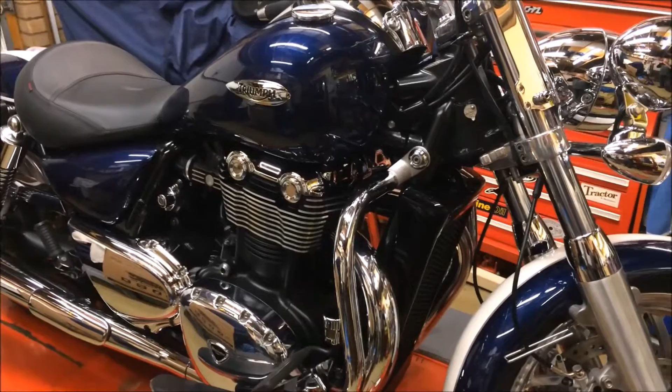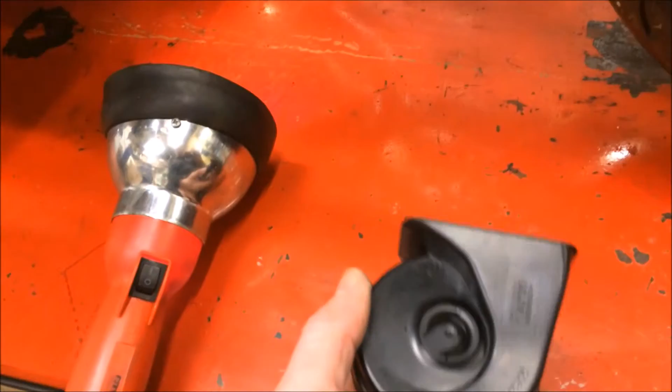Hello, it's me again. I'm just going to start another new project, and one of the things I wanted to do through the winter was I wanted to fit a new hooter on the Thunderbird. The original fitment's a bit weak and feeble, and so I purchased one of these, which I've already fitted one of these to the BM, and it's a good throaty sound.

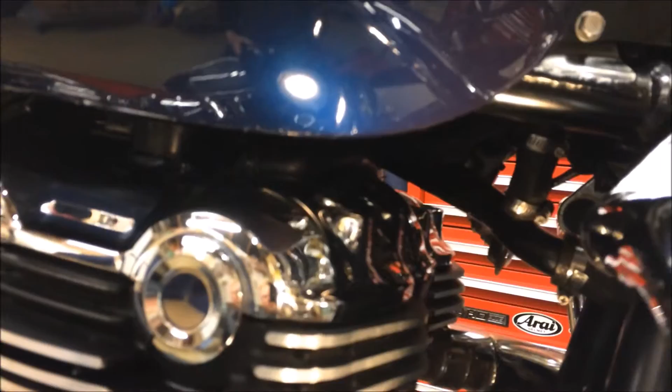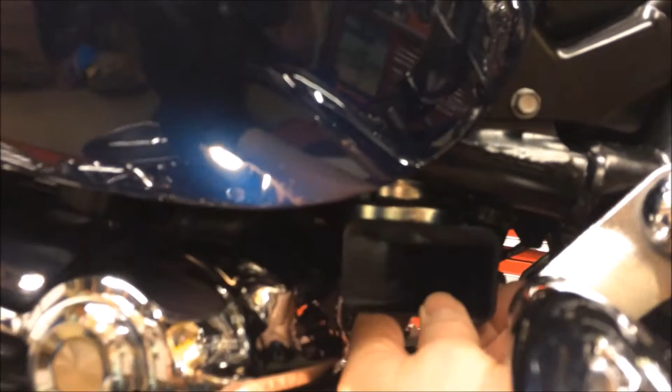And initially I really wanted to tuck it out of the way, and I initially thought it would probably actually go underneath the fuel tank, but it doesn't. There's a lot of space underneath there, but not enough to get this in. And I did originally manage to get it mounted off a bracket just in there, and I thought that would have been

okay. The reality is that it wasn't, because every time you try to get your hand in to clean, you were skinning your knuckles on the horn itself. And the second thing is, it's actually quite exposed there, and I could see it all filling up with water.

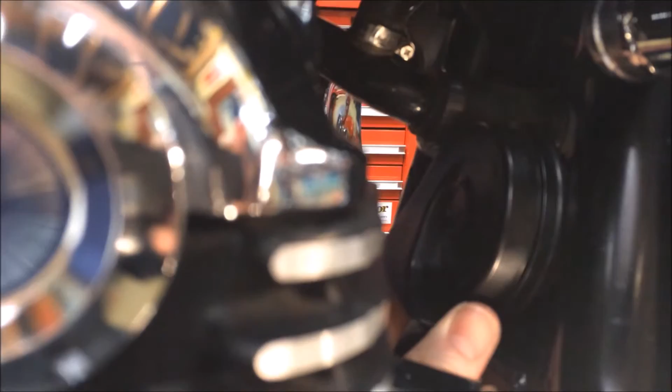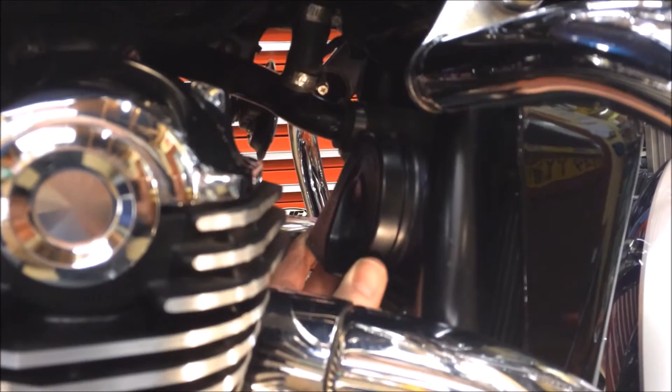So what I'm thinking now is I'm going to try and make a bracket to clamp around this frame cross member here, and I'm going to try and make it so that I can get the horn tucked up in here, so that it's as far out of the way as possible, and it doesn't stick out too much. So that's what I'm going to try and do, and I've had a bit of a think about it. I've done a drawing, so I'll take you into the next room and show you where I've got to so far.

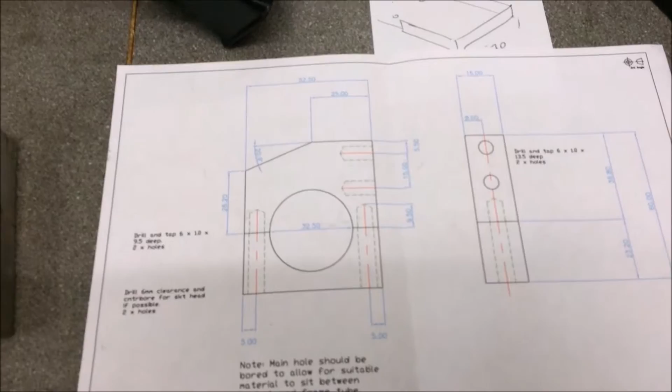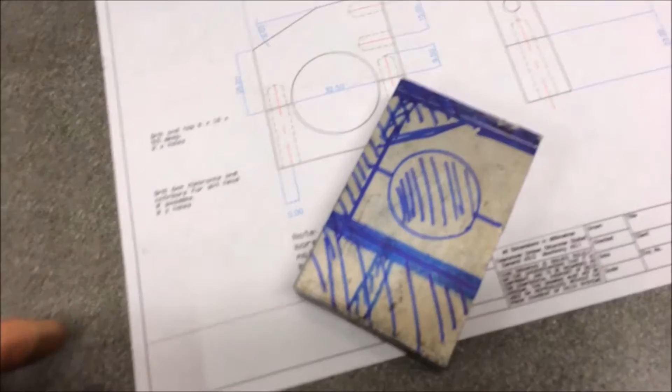Okay, so I've done a drawing, because if you do a drawing it just helps you see lots of things that you are likely to miss if you just try and machine without considering it. So what I've got here is a block of aluminium, a bit of a beat up block of aluminium, but I think there's enough meat in there to actually get this bracket out of.

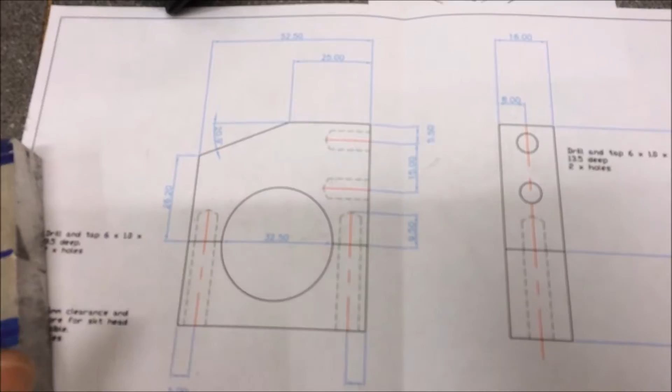And so I've got a block that is 60mm high by 52.5 wide, for want of a better word. Thickness is irrelevant, if I'm honest with you, but this is about, what is this? It's about 19mm. And it's just a piece I had kicking about in the workshop, and I thought that would come in quite useful.

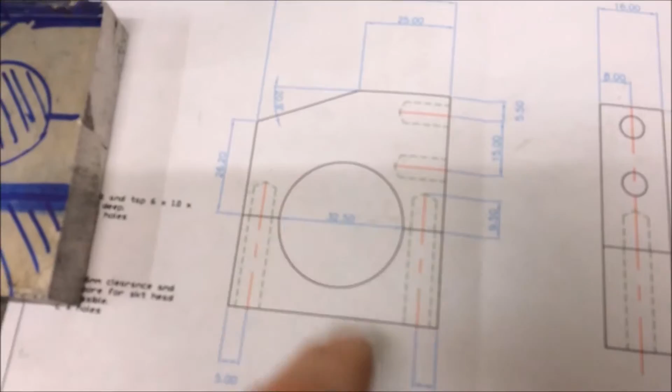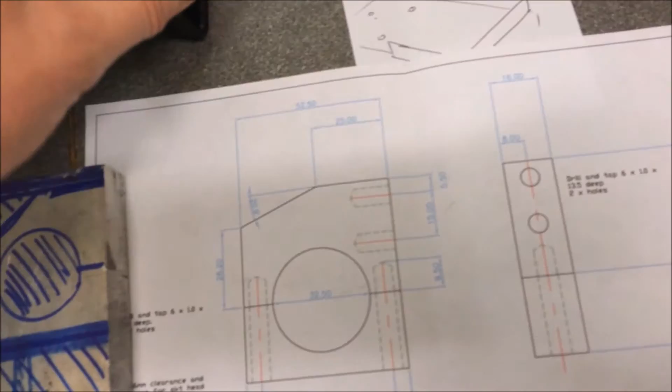So you can see I've got a bore and I've got a split line, so that I can split it and clamp it around the cross tube. I'm going to counter bore these holes for 6mm socket heads that'll clamp it together, and then I've got a couple of extra tapped holes here which I'm then going to put another bracket off to actually pick up the horn. So that'll sit like that, and in theory the horn will sit something like that off another bracket. Probably a bit extravagant, but a bit of fun in making it.

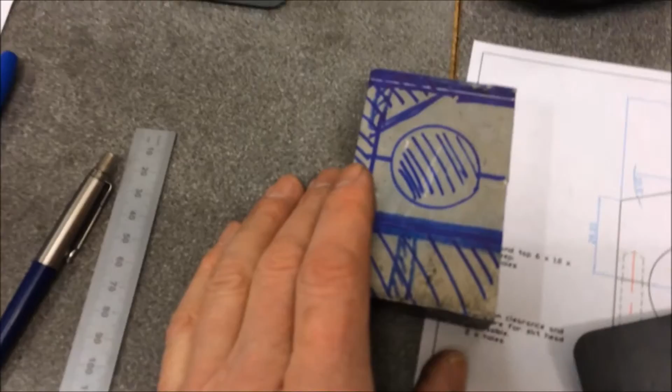So what I'm also going to try and do is, I've got a bit of material here, and I'm going to cut a strip off this once I've actually got this machined down to its final thickness, because what I'll probably do is I'll bore it, I'll slit it, then bore it, and then I'll probably make a spigot up so that I can face front and back.

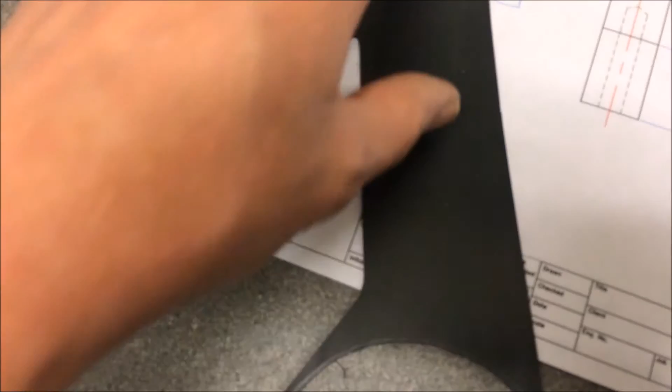So once I've got that down to its final thickness, which may be 17mm, I'll cut a strip off here 17mm wide, and then I'm going to wrap that around the frame tube so that this doesn't clamp directly to the paintwork. Hopefully that'll just give it a bit of isolation and protect the paint.

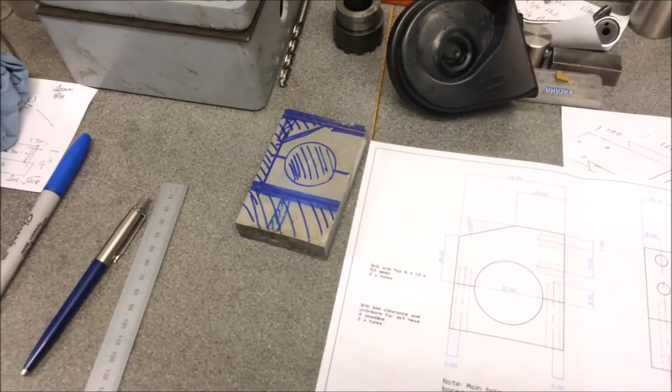So I'm gonna get set up. I'll bring you back in at various stages throughout the project, and we'll take it from there. So this will probably be a number of videos, because I'll try and keep my videos fairly short, and we'll see where it goes.